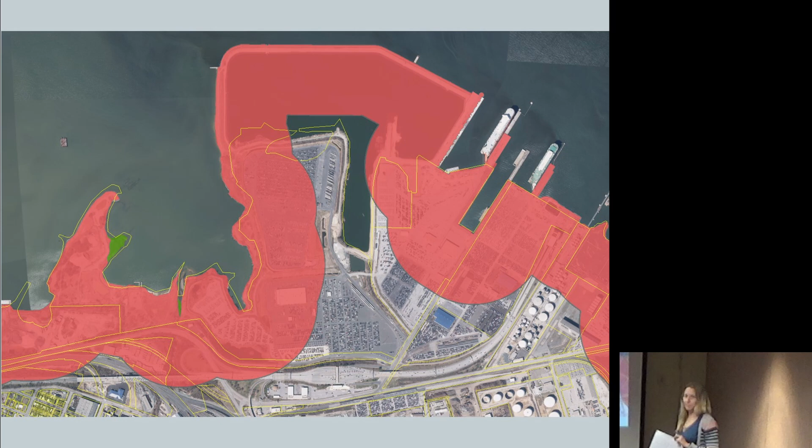The existing conditions: the elevation is currently at 18 feet above mean lower low water. It is an upland disposal site with a dike containment area projecting into the Patapsco River. The site accepts dredge material from the Baltimore Harbor, and the surrounding land use is industrial in nature, receiving offloading cargoes of automobiles, roll-on/roll-off, and light trucks for processing and storage.

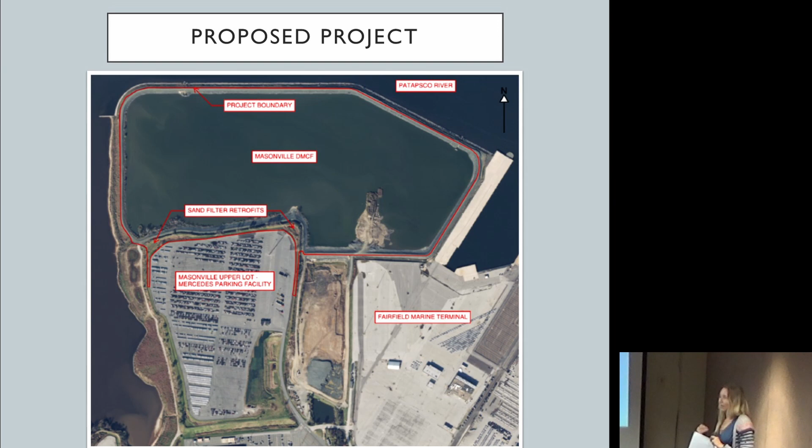The proposed project is to elevate the containment dikes to an elevation of plus 30 above mean low water. It's a little hard to see here, but the limit of disturbance is shown in red. This is step 1 of future build-out phases that will take the elevation to plus 42 for the ultimate build-out, providing an additional 20 years of capacity for placement of maintenance dredge material from the Port of Baltimore shipping channel.

This is attached to your staff report. The proposed project here is showing the LOD in a very light blue—I apologize, hard to see. The blue connotes the amount of impervious surface that will be newly added within the buffer.

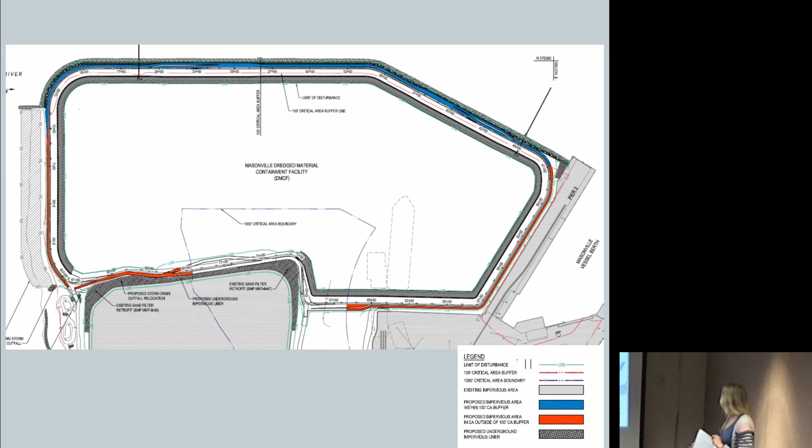The red shows the impervious surface that will be outside the critical area buffer. Currently, the LOD is about 29 acres, of which 17 acres are within the critical area. With the proposed project, additional construction will occur with the dike raising.

This is the typical cross section, also part of your staff report. They're installing a 2-foot-high concrete block and a perimeter maintenance access road that will vary between 12 to 20 feet. This is part of the overall mitigation and impacts we'll get into.

Currently, this is the elevation at the DMCF. They've already put material to widen the base for the raising, which was all within the containment area of the DMCF. They're also installing a vegetative mechanically stabilized earth, or MSE, retaining wall to support the raised dike embankment, and installing an impervious liner along the base of the existing southern dike to provide stability and prevent seepage from the adjacent impervious surface where cargo was being stored.

They're reconstructing two existing filter stormwater management facilities, and will temporarily remove and replace a 2-foot strip of pavement after installation of the liner. This shows the plus-30 elevation, and the hatched lines show the future phases at the plus-42 elevation.

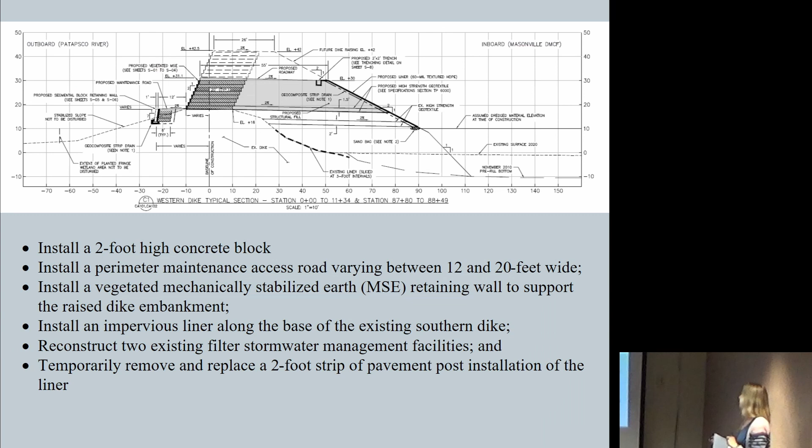This is an example of what the MSE retaining wall looks like.

For the proposed impacts, approximately 17 acres are within the IPA. You can see the LOD along here, along with the critical area boundary. Total new impervious surface within the critical area is 3.22 acres, of which 1.92 acres are within the buffer and the remainder outside the buffer.

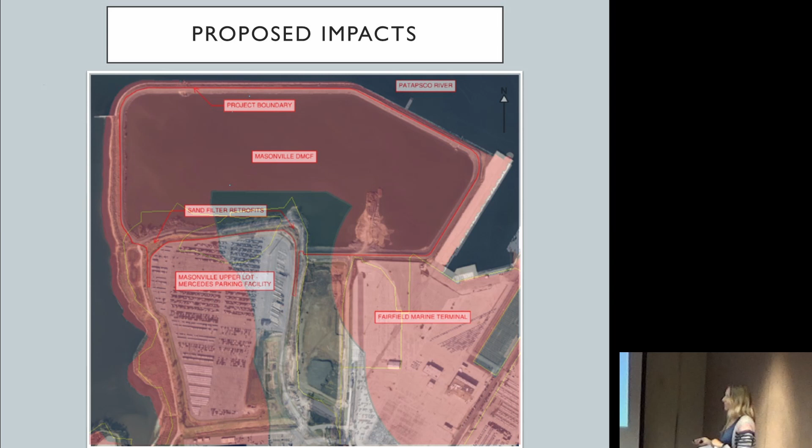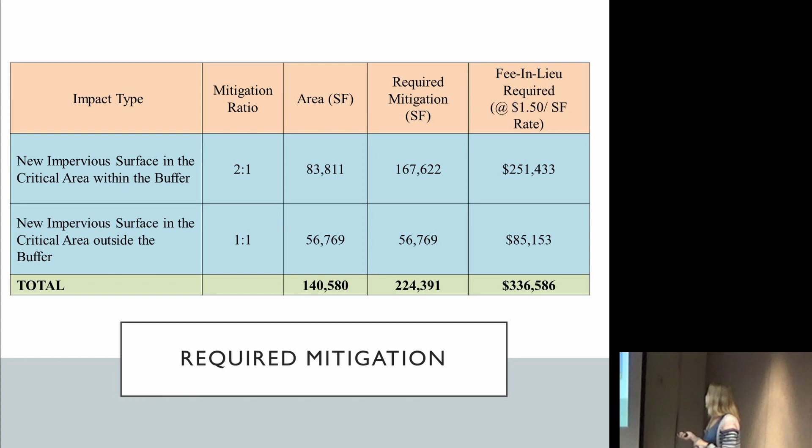For the proposed mitigation, the mitigation ratio is based on the location of the impervious surface, which translates into a fee-in-lieu amount. The total amount the Maryland Port Administration will pay into fee-in-lieu is $336,586, which will go toward water quality and habitat mitigation, sent through to the Chesapeake Bay Trust. That is allowed under an approved MOU between critical area, Chesapeake Bay Trust, and the port, approved in June of last year.

As part of COMAR 27.02.05.02-3, state agencies proposing development activities on state-owned lands shall demonstrate they've considered the likelihood of inundation by sea level rise, and demonstrate the development identifies and incorporates climate resilient practices to avoid or minimize environmental or structural damage associated with coastal hazards, extreme weather events, sea level rise, and other coastal impacts.

So the response from MDOT MPA on how they're meeting this requirement: the elevations of the current DMCF and the proposed up to plus-30, under evaluation through 2100, will not be impacted by sea level rise because of its elevation. The DMCF is currently armored in a revetment that is above low water at 7 feet, protecting it from storm events now and into the future. Storm surge categories 1 through 4 were evaluated and will not impact the DMCF due to the elevation.

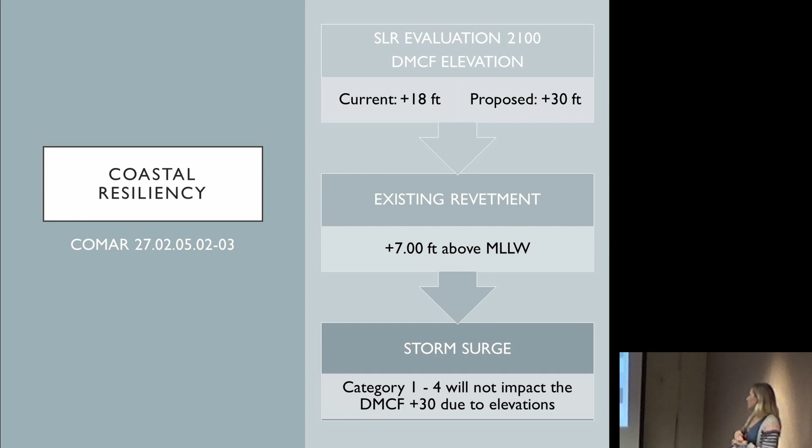For agency reviews and permits: for dam safety with the Maryland Department of Environment, coordination is currently underway. Stormwater management and erosion sediment control concept approval was granted in November of 2019; however, due to COVID, the project was put on hold and resubmitted. MPA received concept approval in June of this year and anticipates full approval by this month.

The tidal wetland license was approved by the Maryland Board of Public Works for the full build-out at 42 feet elevation, and there are no non-tidal wetland impacts associated with this project.

Coordination with the Department of Natural Resources Wildlife and Heritage Services indicates there are no impacts to rare, threatened, or endangered species. There are historic waterfowl concentration areas, but this project will not impact them. Maryland Historic Trust indicated no impacts to historic properties, and U.S. Fish and Wildlife Service indicated no critical habitats, refuge lands, or fish hatchery impacts associated with this project.

MDOT MPA met the public notice requirements on May 25th of this year. Signs were posted on site, and notice was advertised in the Baltimore Sun. As of today, no comments have been received.

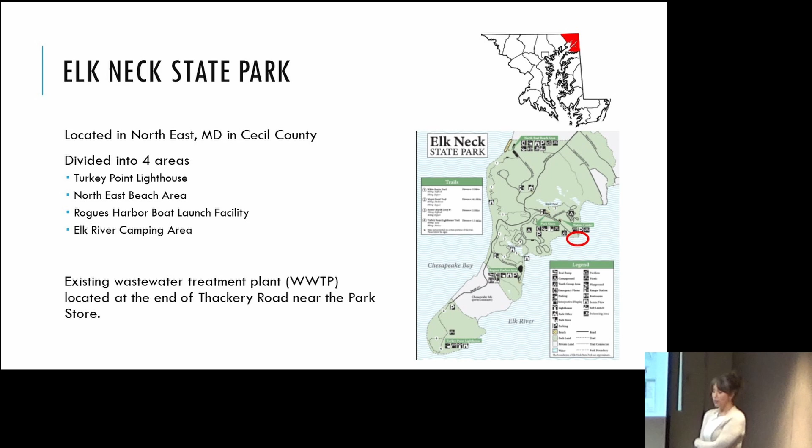So Elk Neck State Park is located in North East, Maryland in Cecil County. It's divided into 4 separate areas of the park. The wastewater treatment plant is located here, which I believe is part of the Elk River camping area section. The plant itself is located at the end of Thackery Road near the park store.

So existing conditions at the site - this is the wastewater treatment plant right here. You can see it's located right at this point, very close to the water. It is in the buffer. The current wastewater treatment plant requires upgrades just in order to meet the current demands of the park. Honestly, it's not meeting those demands currently. And then the upgrade will also allow DNR and MES to convert it to an enhanced nutrient removal system.

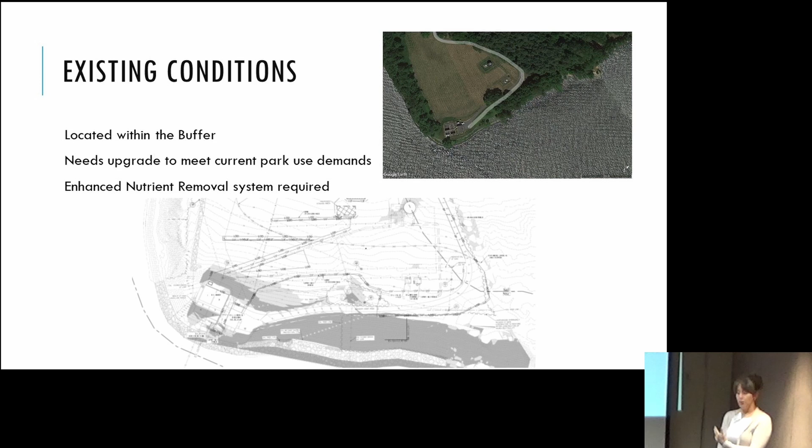So there are impacts to the buffer proposed with this project, given that it's located in the buffer, as those impacts are pretty unavoidable. Mitigation will be provided at 3-to-1 for those impacts. There's also a 10% pollutant reduction required, and that will be met with a micro-bioretention facility on site, as well as 3 micro-infiltration dry wells.

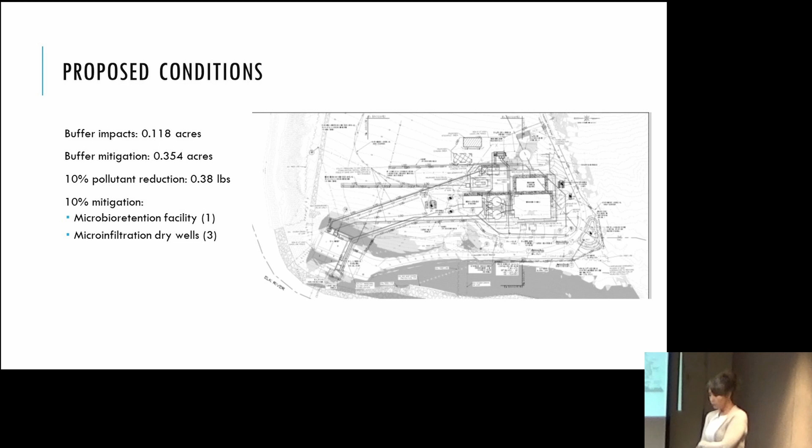So the existing wastewater treatment plant is right here, and then the expansion is actually going to occur up this way, but my understanding is that this part of the plant will still remain and will be part of the upgrade. So the mitigation is currently proposed in this area here, which is within the critical area but outside of the critical area buffer. And so Commission staff, when reviewing this project, felt that there could be potential to meet some of the buffer mitigation in the buffer on site. I will discuss that later in the presentation when we get to the conditions of approval.

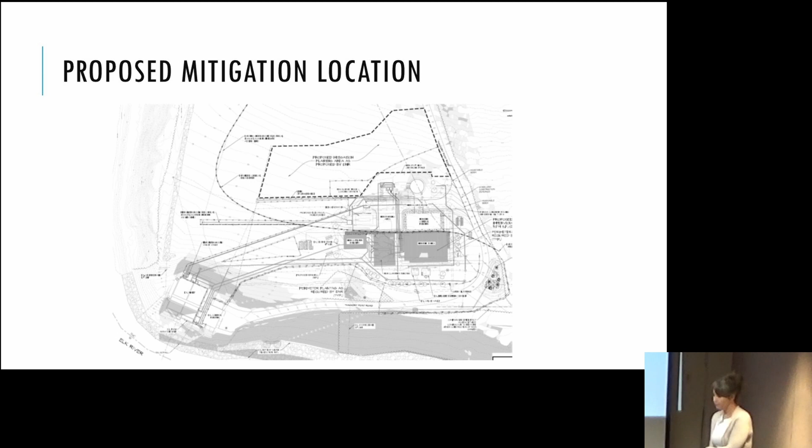So the project has received concept stormwater approval from MDE. DNR Wildlife and Heritage Service found that there were no records, state or federal, listed candidate proposed for rare plant or animal species. Public notice was met with a sign posted on site, as well as a notice posted in the Cecil Whig, and my understanding is that no comments have been received regarding that public notice. And there were no impacts to historic properties per MHT.

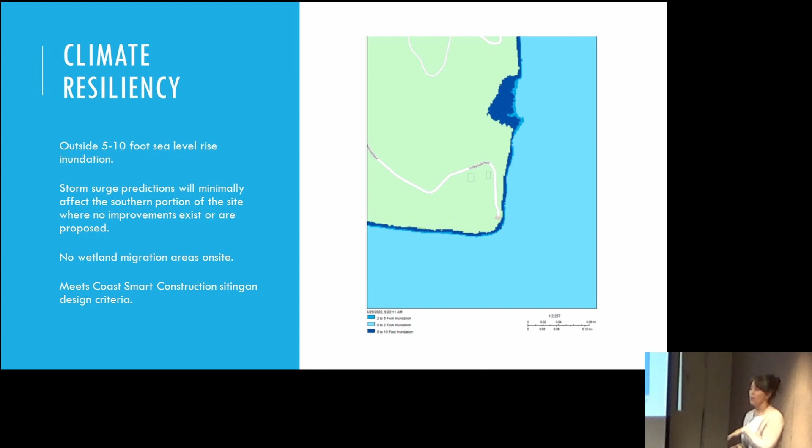So climate resiliency - again, the site is right here, so it is outside of the 5 to 10 foot sea level rise inundation. Storm surge predictions will impact the southern portion of the site minimally, but there are no improvements currently existing in that area, and there are no improvements proposed in that area. So the area of impact will not have any structures located there.

There are also no wetland migration areas located on site. The nearest wetland migration area is located up here.

Furthermore, the project meets the Coast Smart construction, siting, and design criteria because it's located completely outside of the CS-CRAB boundary. So, as I said, this project does require conditional approval from the Commission due to the impacts to the buffer.

You can refer to pages 3 to 5 of my staff report for more detailed analysis of the conditional approval standards. But just as a summary, the existing facility is already located in the buffer, therefore improvements to that facility would be difficult, if not impossible, without impacts to the buffer. The existing facility does not have capacity to treat the existing need, and the upgrades proposed here will provide a public benefit through improved sanitation and additional improvements to water quality.

Other than the impacts to the buffer, the project is in compliance with all critical area regulations, and the mitigation for impacts to the buffer, as well as the proposed stormwater management on site, will provide substantial environmental benefits, as will the improved sanitation measures of the treatment plant itself.

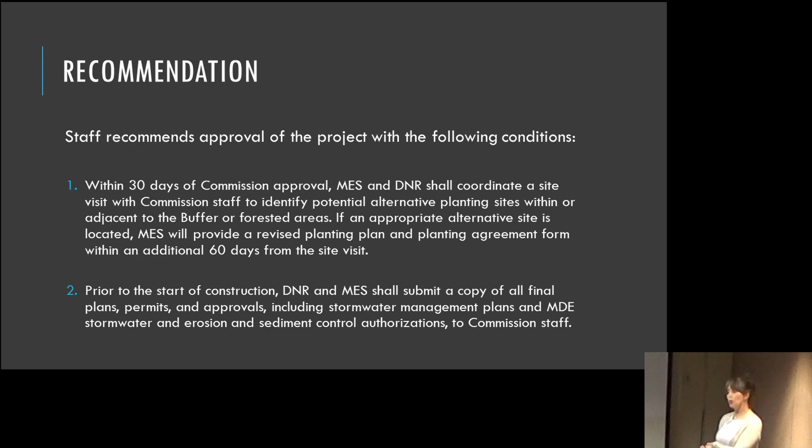And then prior to the start of construction, DNR and MES will submit a copy of all final plans, permits, and approvals, including stormwater management plans and MDE stormwater erosion and sediment control authorizations, to Commission staff. Are there any questions?

That's my foster dog. He's available for adoption. Nicely done. His name is Whiskey, and he's very sweet and adorable.

I have a comment. So was the design, did you incorporate the increase in capacity? I know it's an ENR upgrade, so you're looking at nitrogen and phosphorus reduction, but is it also being designed for flow?

No, flow is not going to change. It's really designed as an ENR. The new plant will be an ENR plant, and we will take care of phosphorus and nitrogen. The old plant doesn't do that at all. So the capacity wasn't changing? Capacity is not going to change.

And then I guess there was, I know the permits were obtained for some of the other MDE permits, but the NPDES permit, has that also been, does that come after the fact, after the ENR completion is done, or in process? It's concurrent. We know it's coming. We're under the existing permit now. That's the old one, but they're going to change. They change every 5 years. So we're due to change, and we've been told it's going to get much more stringent.

And is it a groundwater or surface water discharge, the plant? Surface water goes right into the outflow. It's actually a submerged discharge out into the river.

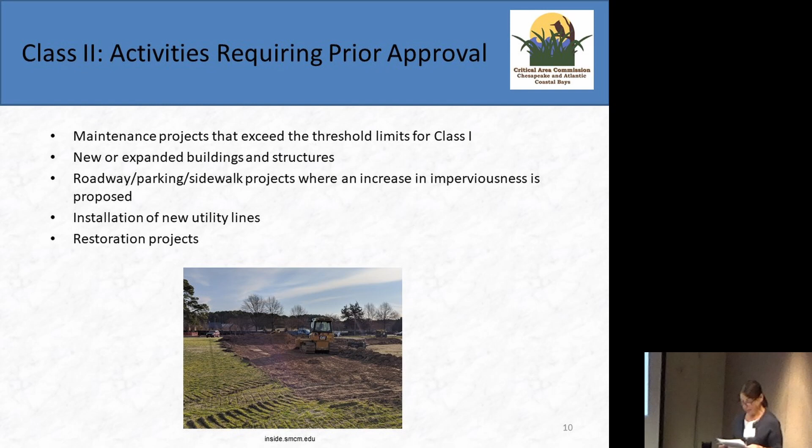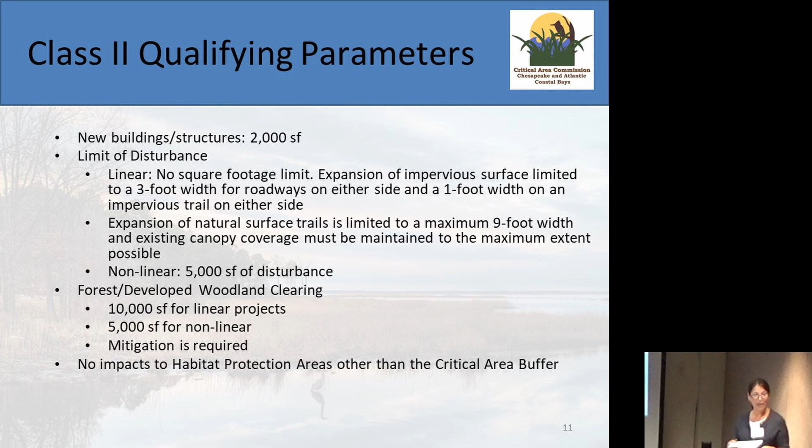The thresholds for disturbance impacts listed under the qualifying parameters may be exceeded by minor amounts if St. Mary's College provides written justification for the exceedance. The critical area staff will review this submittal and determine if the project fits the intent of the MOU. If the project does not meet the intent of the MOU, it will require full critical area commission review and approval. Section 3.1.9 of the MOU on page 11 includes examples of justification, such as the nature or intensity of the project is not changing, and after completion of work, the site will be restored to original conditions.

Attachment 1, mitigation, begins on page 14 of the MOU. This attachment includes guidance related to stormwater management, a master buffer management plan, and a buffer use areas map.

The stormwater management section includes a list of landscape options for stormwater best management practices that may be more suitable for historic sites, given the constraints with ground disturbance potentially impacting archaeologically sensitive areas.

The Master Buffer Management Plan identifies several specific uses allowed within the buffer at St. Mary's College, including public access areas and existing view sheds.

So the buffer use map is shown on this slide. You can see some of the existing view sheds looking down from campus. You can also see an area of restored shoreline here along the St. Mary's River, and this is a living shoreline project along St. John's Pond.

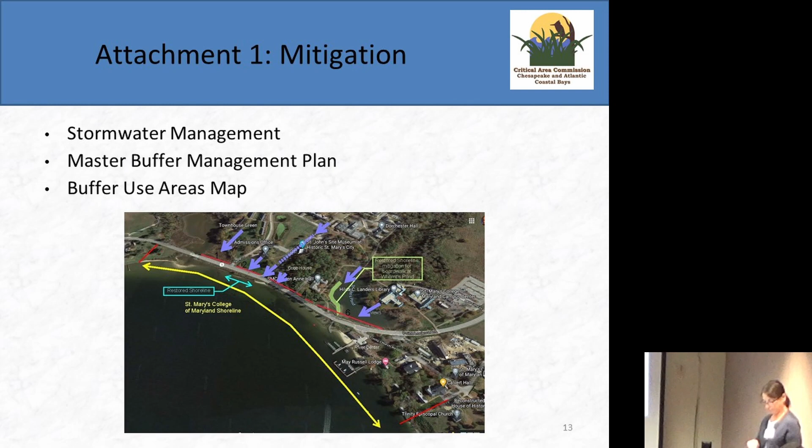Attachment 2, the site-wide climate resiliency assessment, begins on page 18 of the MOU. Per COMAR 27.02.05.02.A.2, state agencies are required to consult with the Commission as soon as practical in the project planning process to assess climate resilient practices that address coastal hazards, extreme weather events, sea level rise, and other impacts.

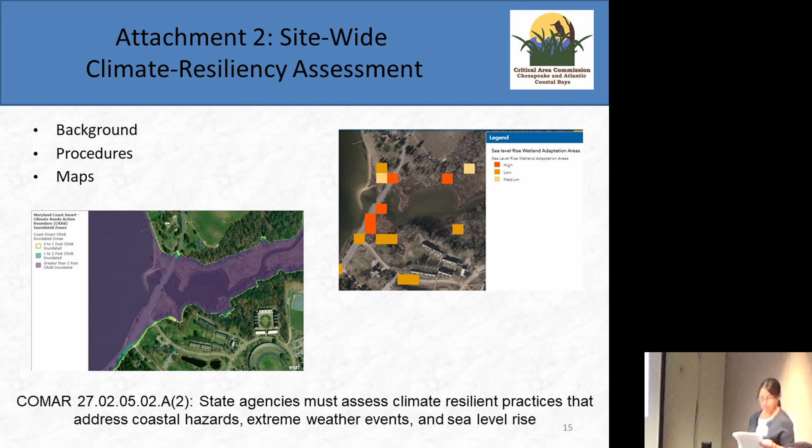St. Mary's College will use the procedures included in Attachment 2 to determine whether a proposed project is located within a vulnerable area. If a Class 2 project is located in a vulnerable area, St. Mary's College will follow the guidance outlined in Attachment 2. The college is also required to review all applicable capital projects in accordance with the Coast Smart Construction Program guidance as amended, to ensure avoidance and minimization of impacts to St. Mary's College projects in vulnerable locations.

Attachment 3 includes two tracking spreadsheets. The first spreadsheet tracks Class 1 projects for annual reporting. It includes columns that correspond to the items listed in Section 2.1 of Exhibit A, reporting requirements. The second spreadsheet tracks mitigation projects that have mitigation requirements. The spreadsheets will assist with the preparation of the March 1st annual report for Class 1 projects and will ensure that the mitigation requirements for all projects are tracked and monitored.

So staff recommends approval of the St. Mary's College of Maryland Critical Area Commission MOU.

So I have a question. On page 9 of the MOU, there is one bullet that speaks to the maintenance of natural surface trails, and it talks about including minor filling or minor rerouting of the trail itself. How is that being defined? Like, in terms of ground disturbance, from an E&S standpoint, it's ground disturbance, not just... So I'm wondering whether or not, in your mind, how you are viewing minor rerouting when it comes to new disturbance.